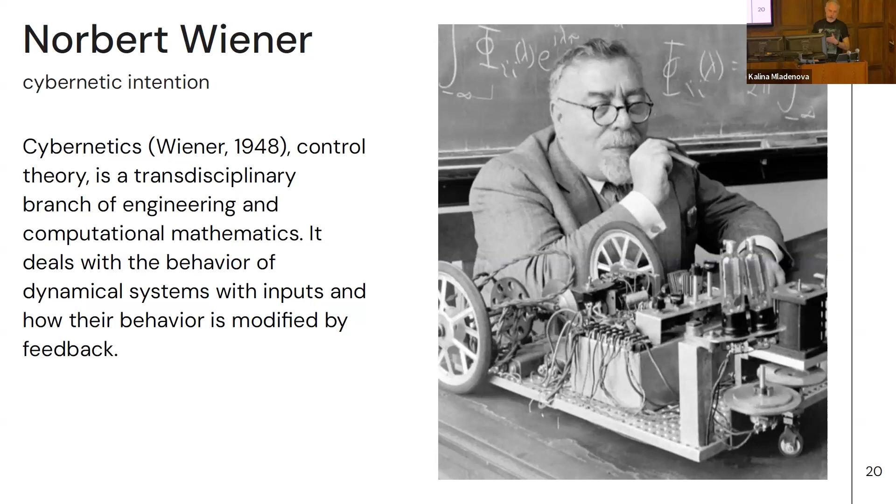One of the great inventors was Norbert Wiener in the 50s, and basically what he tried to do was engineer the feedback, the concept of feedback. Generally when those digital products—MES and so on—fail, it's because the feedback is not completely integrated, but it's a very core aspect of the digital. It's a great opportunity to go along that feedback, and I will of course give you examples. So feedback, very, very important. I have put at the end of this presentation a bibliography with a few books I'll share with you.

There is another aspect, and maybe at the end of this talk we can discuss not only the digitalization of industry, but also digital itself, and how it affects our society. I know that in the US, you like very much the French philosophers, especially those of the 60s and 70s - Deleuze, Guattari, Foucault - actually more than in France. In France, we dislike it, at least the students and professors.

Gilbert Simondon was a friend of Deleuze, actually, and he wrote a thesis about the nature of technical objects. He says something very important to me that explains a lot about how we collectively deal with technology: if we don't properly understand the nature of technology and machines, there will be an effect on society, which is both sacredness and rejection.

We see a lot of this - you open the newspaper and see that TikTok is very dangerous for kids. This is definitely rejection. On the other side, you look at startups in San Francisco, OpenAI for example, that can raise $7 trillion to build factories - both ways. And general AI will happen. This is completely false, but it's very interesting to see that somehow.

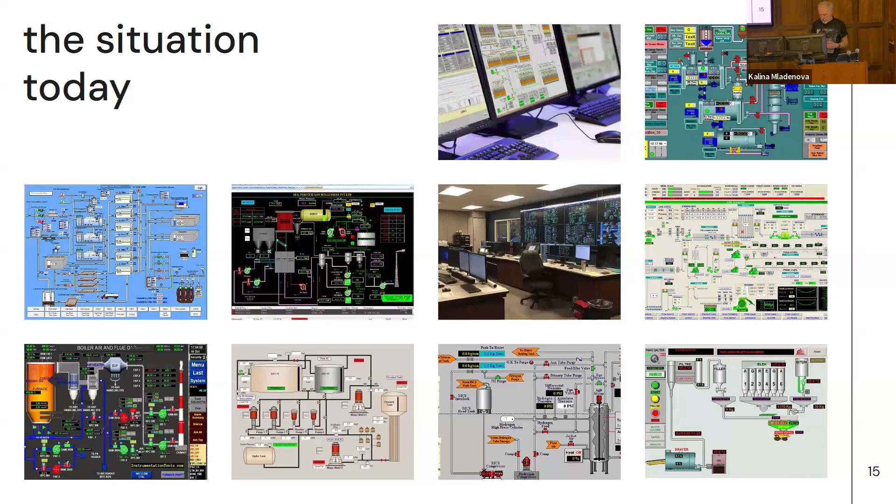Like you said, Chris, when you look at that kind of screen, here it's command and control. In order to do that, you can do a lot of things - basically whatever you want with the machine. But it means you are controlling that machine, you know everything about it, you are the master. But this is not actually the case in what you're trying to do in terms of digital. What you try to do is shift from command and control to being in charge, and this is completely different - you can be in charge without controlling, at least not so directly.

There is an important aspect here - something I saw from a French banker who explained his point of view on the difference between the physical world and the informational world. I think it really explains a lot of the difficulties industrials face when they try to integrate this informational world.

Industry is about a physical world, very tangible. When you go into a factory, you cannot cheat - you cannot say something is not happening if it is happening. You are dealing with physical material, and so on. We are talking about fixed standards - cubic meters, inches - and those are standards across the entire world. A meter is a meter, it's always the same meter.

We are also talking about finished products. When you deliver the potato chips, you cannot alter it, you cannot redo it - it's finished. And of course we are talking about the physical aspect of things, especially when we talk about machines that replace operators, the physical things.

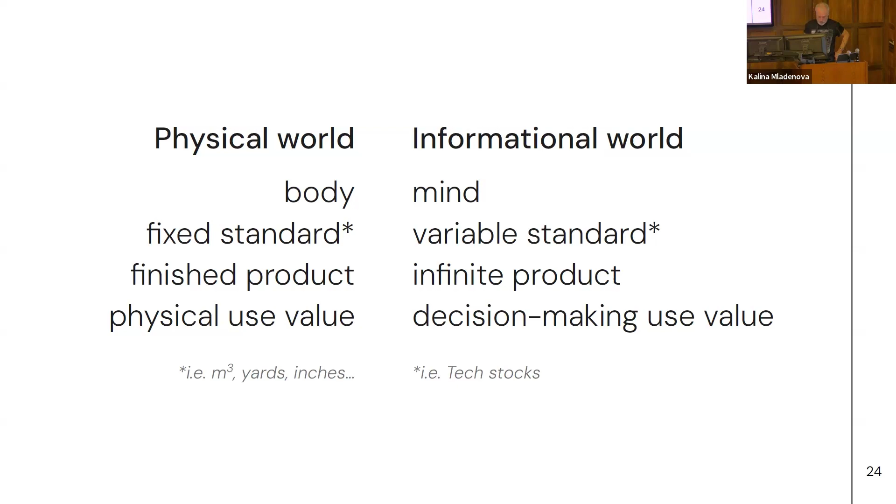Very, very quickly, I won't make a course about design, but there is one thing that I learned from my wife. I'm self-taught, and I literally married design. My wife is a great designer, and she's my boss also.

And she's listening to me. So there is one thing that she understood about design. Not every designer understood that, but it's very important in terms of project management, how to design things in this digital realm.

Is the fact that if we look at what is informing, giving information to something, there are two ways of doing it. You can use text, and language is by definition a way to convey information, but there is a problem: language is very, very ambiguous. The hallucinations of OpenAI or any AI, they are not really hallucinations, it's because language is very ambiguous.

If I'm talking about an ERP, and if I ask every professional here what is an ERP, you will all have a different answer. It's true also for MES. I have maybe 20 clients, 20 different definitions of what is an MES. So words are very, very ambiguous.

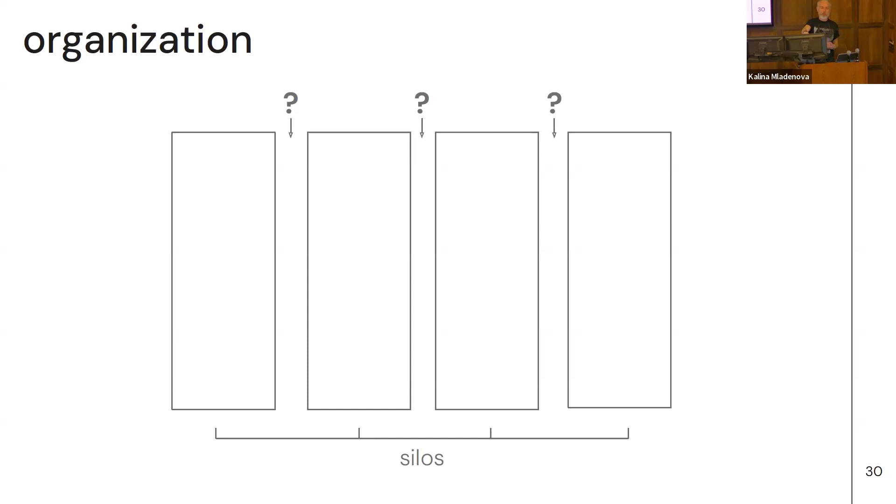This is why ownership is very key, because if you try to make something transverse, somebody needs to take that ownership, even temporarily. This is the only way to go through that kind of product. At the end, you can give the product to one of the parts of the silo, but still it's a problem.

I won't talk about maintainers, I'll just share my feeling about maintenance and sustainability regarding industry. Today we will mostly talk about factory managers, line managers, machine operators - people very grounded in factories. I won't talk about business unit managers or world company managers, but still, everybody is involved in digital transformation.

Normally, everybody should have the same screens and share the same reality because this is the same factories and the same assets. Like you said, Chris, the problem is the know-how.

And this is not only true for operators that last for 8 weeks or 8 months. No, it's true for everybody because of the boomers. Boomers are leaving, they are going to retirement in entire sections, and they knew how to run things. We are losing know-how every day in every factory in the entire Occidental world. I think it will be true for China in future years too, because they have that problem as well.

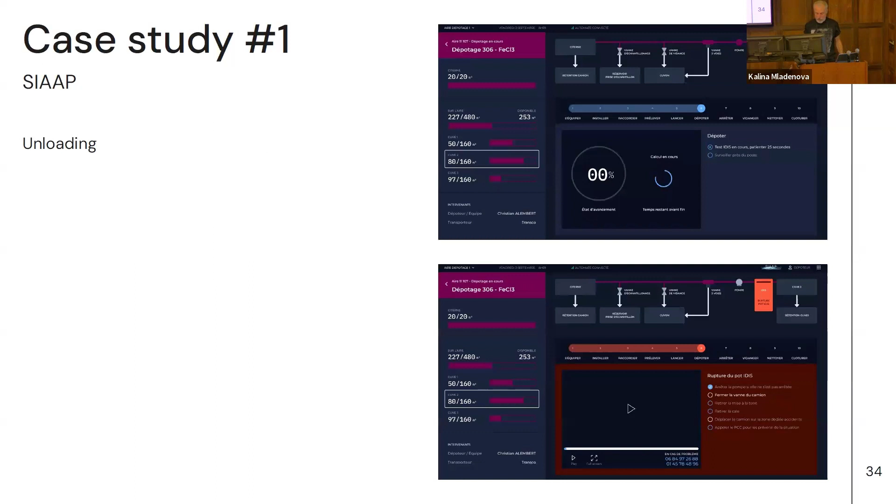This is the key aspect, there is no other aspect actually. This is the only problem everybody is facing, or at least the main one. So how to deal with that know-how? I will now give you 3 examples.

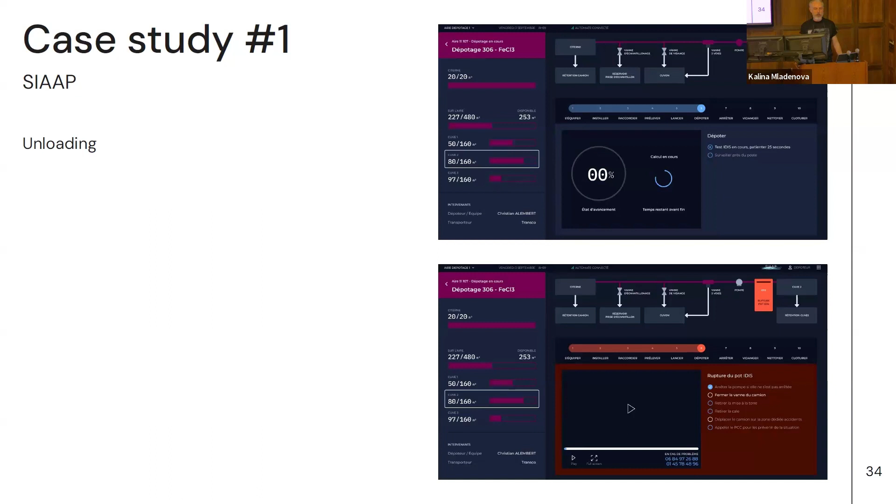The first one is a very basic one: unloading trucks in water treatment facilities. This is the interface that operators have today - buttons, no manual. And here you can see, I'm talking about unloading dangerous products, hazardous products.

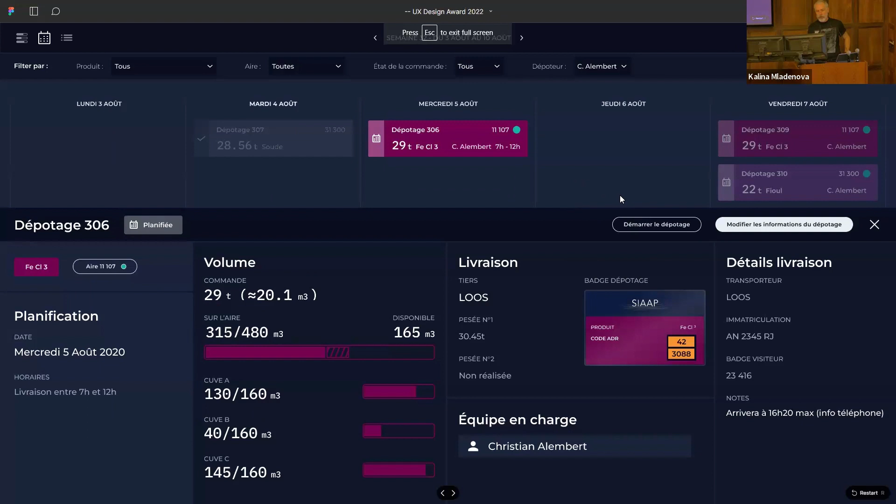And here, this is what we could design, what we can actually do. This is a real life example. So let's go here, for example.

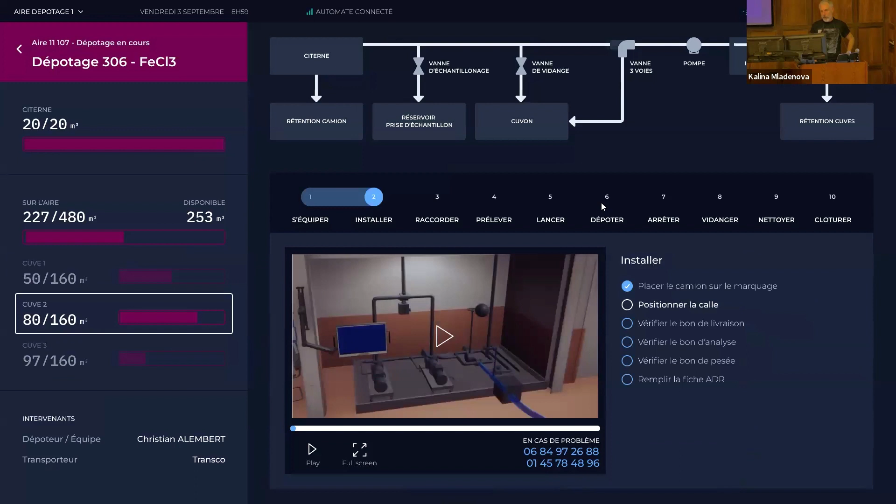There are a lot of principles that should be applied in every factory, in every screen. Those are principles that are very simple and basic. The first one is feedback - for every step, the operator has a feedback on what they are doing. Second, the context.

Here, an operator can use that interface and unload very dangerous product in less than 5 minutes - if, of course, he's capable of it. Not everybody is capable of doing that kind of thing. So you have the context: where to unload, the quantity available in the tanks, the quantity in the vehicle, the people in charge, the organization of the system, where the product is in that system, the documentation of all those different tasks, and if the operator doesn't know how to use it, there's a small video he can play to get the information on what to do.

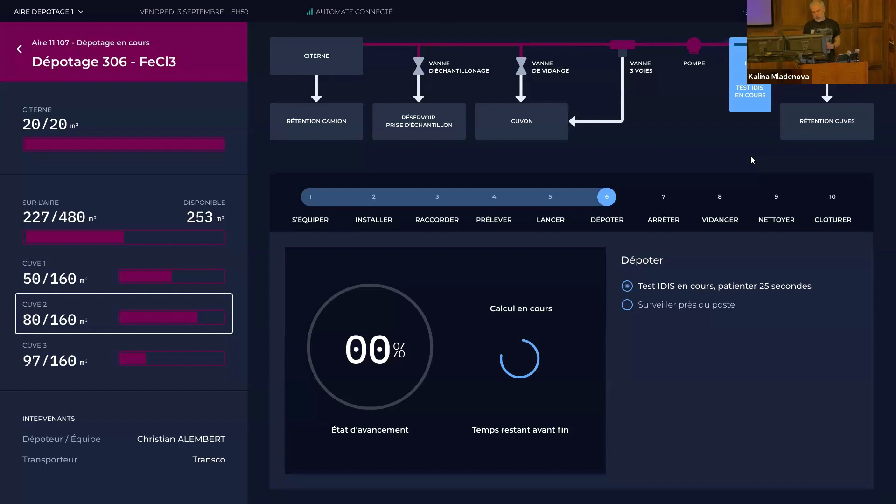This is especially true for one thing related to cognition. There is a problem with humans - when they are stressed, they lose cognitive capacities. It has nothing to do with intelligence or IQ. If I'm yelling at somebody, he will lose cognitive capacities. And here we are talking about unloading very dangerous products - when you do that, you put people at risk, yourself and the population around. So you might be very intelligent, but you won't be at full capacity in terms of reflection, and the problem is when there is actually a huge problem.

And here, this is where it becomes interesting because, okay, simple things to do - let's say we can live without it.

But in case of a very big problem, the operator can follow the procedure to be safe himself, but also to keep the entire company safe. This is a very good example of good practices.

Here again, this is a matter of feedback. There is a problem, you see the problem, but you also see the procedures related to that. To my knowledge, very few companies have that kind of system, because of the silos, because of how procedures are handled. If I go into any factory today and ask for the procedures, nobody is able to give them to me. There was a procedure at some time, but it's in a Word file, an Excel file, on some computer, with somebody. Maybe in an hour, maybe in a week, you could get that procedure. In reality, it's not very industrial or engineered, and yet it works very well.

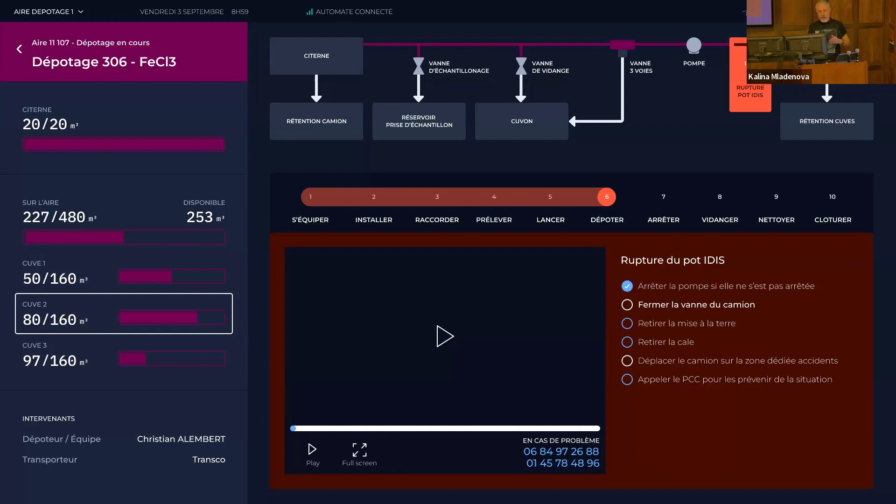The other example I wanted to share with you is a bit different. It's the same water treatment company, a very huge facility, 2,000 acres, so a very huge space.

Again, this is about people, about how people react in front of very complex systems. When I look at that huge factory, there is no manual, no driving wheel, nothing to pilot it with. There are only the screens I showed at the beginning. You see the equipment, but you don't have an overview of what is going on, no clue about the global context. So in that situation, what do humans do?

We tell ourselves stories, collective stories about how things work. Actually, it's true for almost everything. We don't understand how banking works, for example, so we tell ourselves a story, maybe in groups.

So our work was to work with the actual operators of that huge factory and try to figure out what stories they were telling themselves. Not only the procedures, but the overall context, how they run that huge facility, wasn't written anywhere. It was the 20 to 30 people running that facility, or that part of it, who told themselves a story about how to run that plant, but nobody had written it down, and it wasn't on the screen.

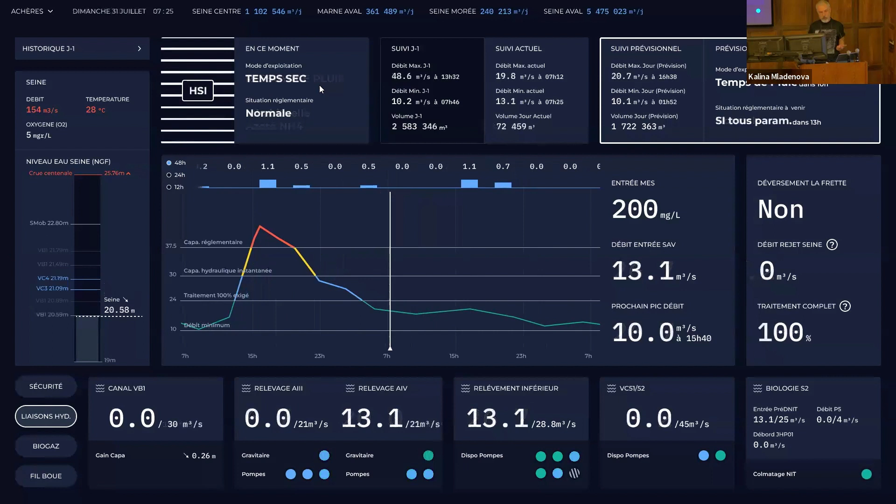So this is what we did: we put all the stories together. Of course we also put the technical aspect of things, and we put it on the screen. So now in 5 minutes, they can have an overview of what is going on, what the next step is, whether the plant is running right or not, and of course they get information about several contexts, like for example the level of the river, which is very important in that case.

The reason why it works is because of that. We were talking about MES and so on, and it's true for everything. One of the key reasons for the failure of digital transformation in industry is that you ask engineers, and only engineers.

They don't provide very good screens. This is their point of view: they are in charge, they should know, and generally they say that if things are not going properly, it's because of the operator. But the reality is not exactly that. Of course the engineers know how to run things properly, they are engineers.

But at the end, there are people dealing with the equipment and facilities all day long. They know how to run it. So generally, digital transformation fails because you just ask engineers and say, okay, operators will obey these new things, and it doesn't work. Of course, if you do the opposite, it doesn't work either. You should have everybody in the same room, again, because of silos.

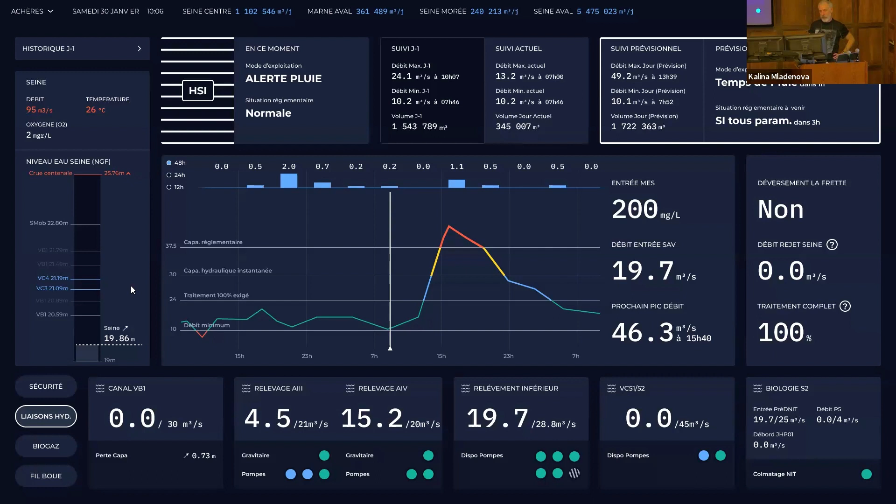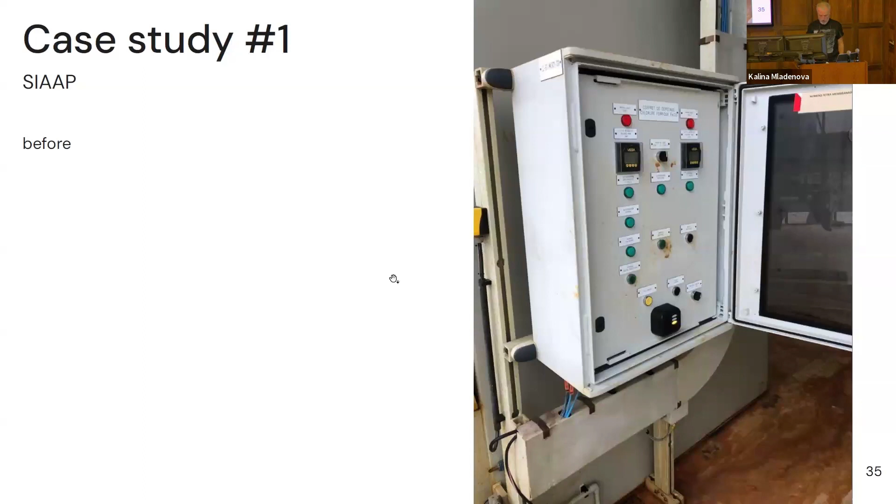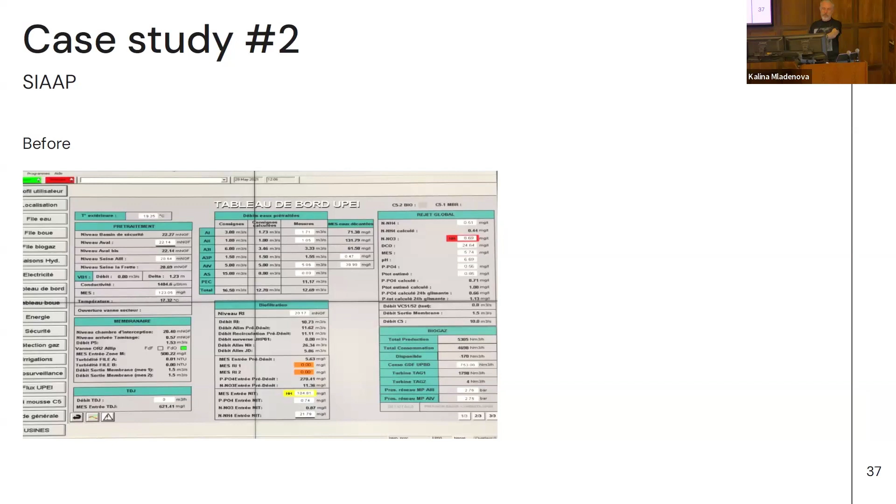For the third use case, I will ask Chris to come and talk. This is basically the screen that they have today on the huge facility - that kind of screen where there's a lot more information than the screen I showed. This is the new screen, there's more information here, and this is much more legible.

Nice, these are your slides. Oh, just okay, if you want to present very briefly, Heat and Control. Let me just say, real quick, that...

You guys, I'm really excited for you because the operators you saw in those slides - those people are going. The operators who understood how to read those screens are moving on. If you bought a Utz potato chip, it was produced at a plant where the husband worked the fields and the wife worked the factory. She worked there for 45 years. The person that replaced her stayed for 6 weeks, and the next person stayed for 6 weeks. We're losing that subject matter expertise that knows how to run those lines, and we've got to be able to transition over.

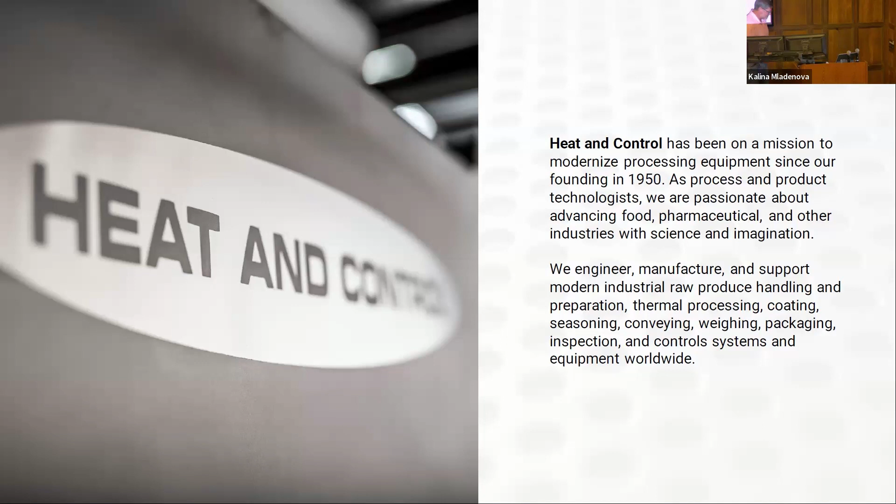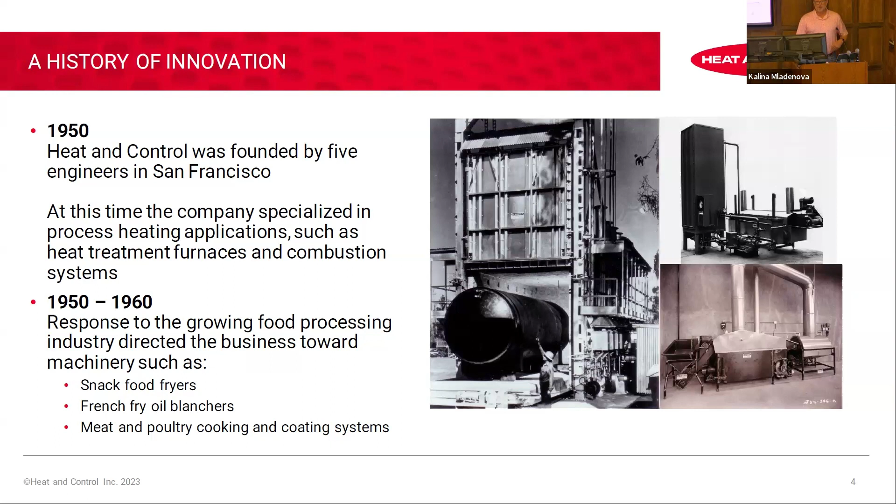With Heat and Control, we make the equipment that produces all those chips. It came over the years in the 50s and 1960s - a couple of men came together and started working in the process industry heating up tanks, and they gravitated over to the food industry. We created these vast big fryers that could do 5,000 pounds of chips an hour. Then those moved into distribution systems, and customers would have to weigh this stuff.

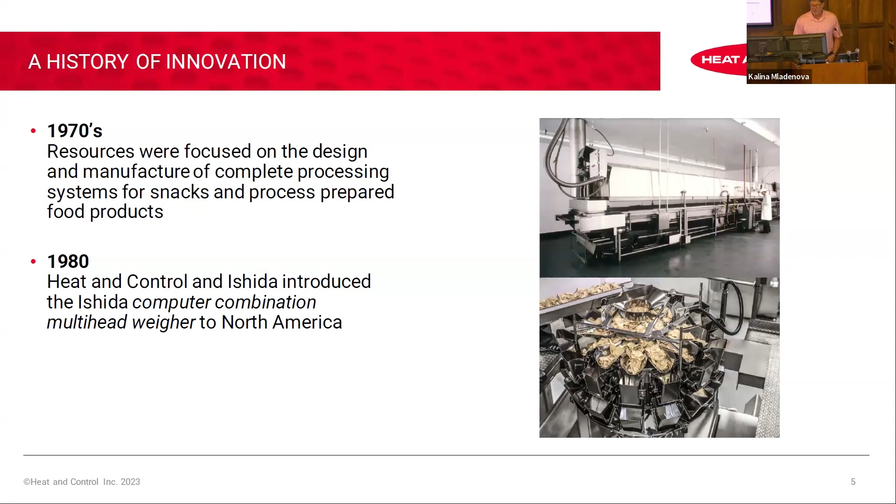When the Japanese stepped in at Ishida to create the circular scale, where we take fast calculations and add up how many chips are in each of those buckets - from that we make a dump, which makes the bag of chips, and we put it in a bagger. We became Ishida's representative in North America. Then we added product handling equipment to move all those chips around to get them to the packaging area. We've added a bunch of companies since then, and we're $750 million globally.

We work with every snack food company in the world. If you're over in France, Europe, and Germany, we work with Intersnack. In the States, we work with Utz, Frito-Lay, Shearer's. We also make egg rolls too, and we do all the pre-cooked stuff that goes into Chili's. The same egg roll that's in some of the nicest restaurants and at Panda Express came from one factory - there's not a lot of creativity when it comes to egg rolls.

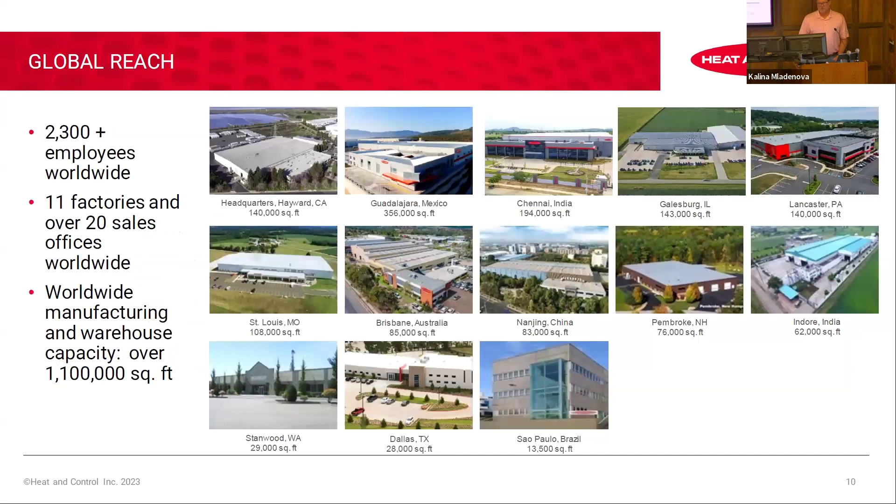Moving forward, we're just a big company and we have a blast doing what we do. But...

Your generation, unlike my generation - when I got out in '86, we just wanted to turn product out the door, make a living, pay our bills, and go on vacation. You have the opportunity to do more than that. You have the opportunity - you've got to do that, it's baseline - but also to help our planet to a certain extent. If you look at what we have in the way of the planet right now, 14% of the earth is fertile, that's it. We have to help a lot of that percentage in order to grow crops and what turns out to be a potato chip.

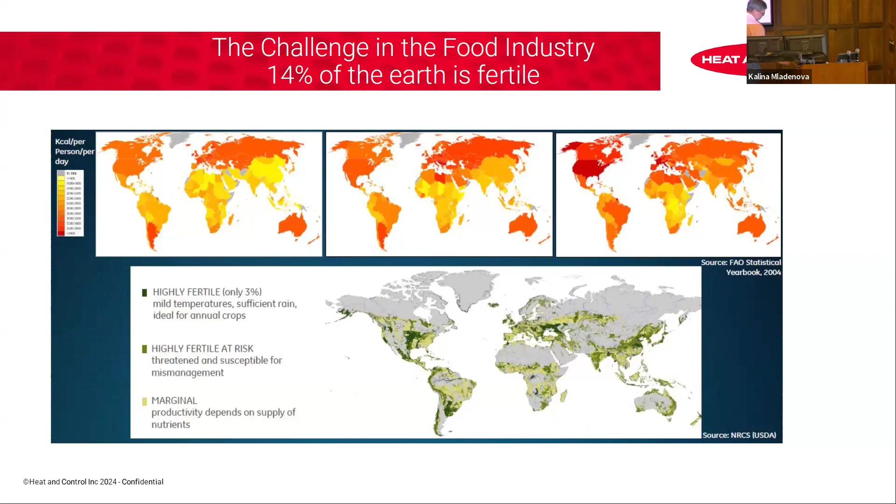When a potato is harvested, it loses just 20% of its content right from the pulling and harvesting. Then as it moves to storage, because people like chips in January and we have to store them until March, we get shrinkage and lose another 9%.

Then in the processing area, we trim the potato, clean it, slice it, and run it through the fryer. We lose about 15% there, and 7% more as the chip comes out the door. By the time we get to final consumption, only 32% of that original potato is left. As a manufacturer in this industry, I've got to create better yield and use less product to make as much volume out the door.

Your generation gets to address that. We're starting to now.

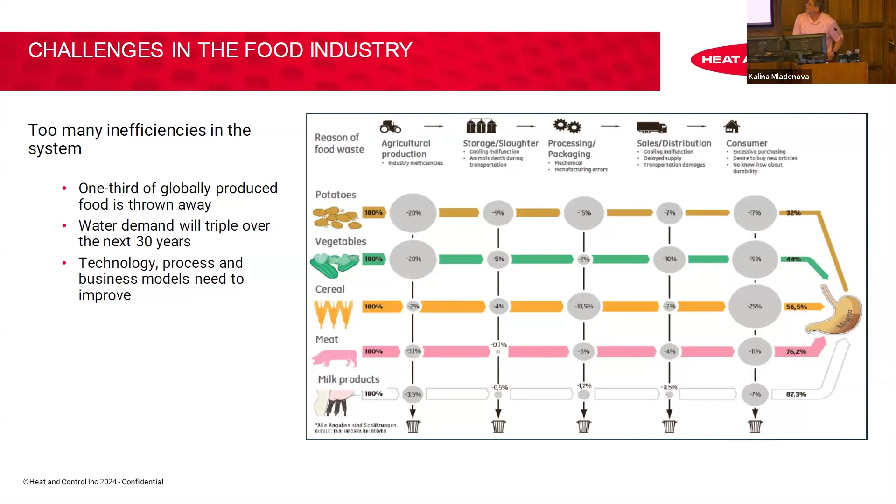There's a 29% reduction in food and snack manufacturing CAPEX, it's just getting tighter. Money's hard to get, so people need to be able to increase yield with what they have. We've got to do more with less, and build better graphics on our OITs, easier things. Better to better beats better to best—think about that. We've got to make screens that help our operators improve every day.

Customers' equipment is near end of life, and a proportion of the workforce is set to retire, 50% by 2025. That's where I'm getting at—that point where the older folks who know the systems are moving on.

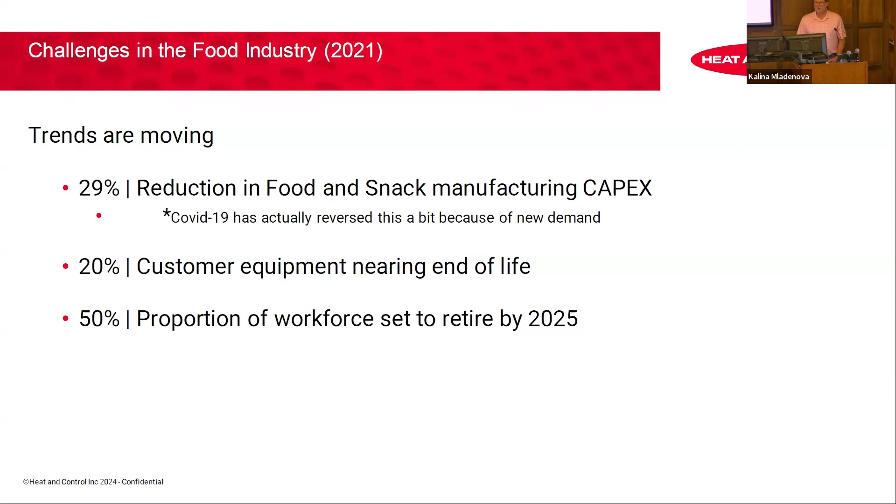In our industry we have high turnover, 6 weeks to 5 months, and you must train people while they're running the line. These very expensive assets, which hold your company's DNA, are being run by somebody who just left McDonald's, like I said earlier. You need to build screens that add value to their lives—people want to do something they feel has value, they don't want to just come in and do the mundane thing every day.

Like I said earlier, we're having to look at gamifying our screens. That's the big push for us right now—how can we make feedback closer to what they experience on weekends or in the evenings, to add value and improve efficiency.

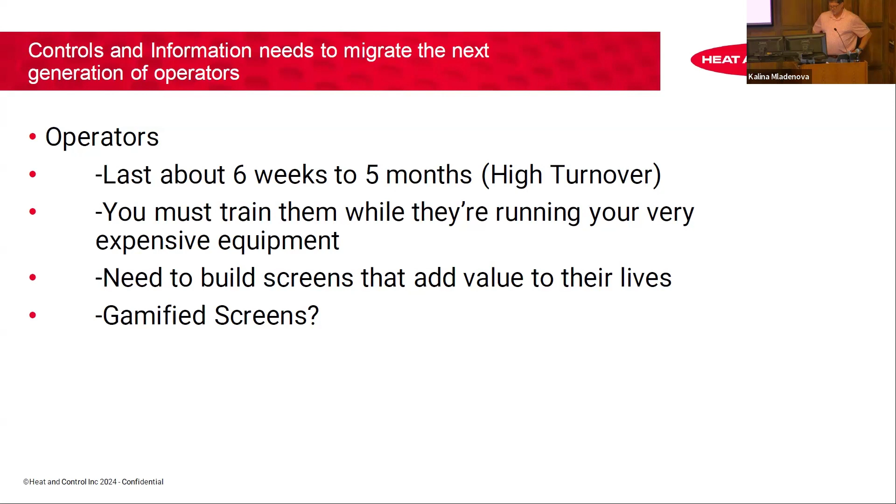So that's us. And this guy did an amazing job with our screen—I will share with you.

So we'll share some of the key screens that we designed with Chris, actually, and the Audis team. Interestingly, you see on top an entire line of production, and here's a good example of what those silos are. The silos aren't just management silos—finance and so on—there are also silos in terms of product. There's a team for the fryer, a team for the in-kitchen seasoning, one for the burner, all completely different. They don't talk to each other because, you know, my equipment is different.

So this mindset of 'my situation is different' is literally the problem we have to solve—basically how to make something that fits every need. And we have to find common ground for that.

One of the things we did was try to respect the fact that, like Chris said, there are trained operators in the field today, but there are also new ones. How do we deal with that? If we make something too easy to use for the old, trained operators, they will reject it because they'll feel like a child. On the other hand, how do we ensure the new ones, the rookies, can actually use it?

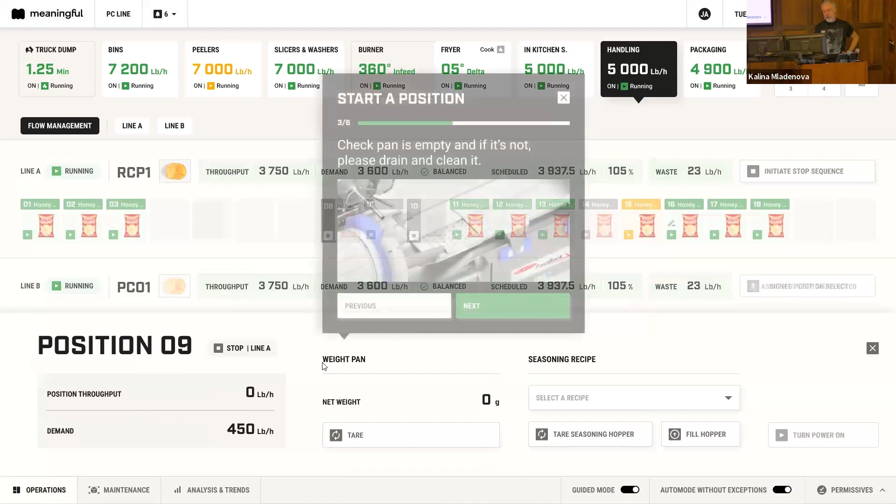If you are not, you can definitely use this guided mode. We designed all the screens with all the content of the different steps, so the operator can actually follow what is at stake.

You are saying, Chris, that the idea is how to make meaningful things, trying to help the operators have more meaning in their work. Training them live helps them understand what is going on. It's meaningful because people want to understand what they are doing, basically. And if you think of your screens or your HMI as media screens, they are media. You can do a lot of things with media. You can control, but you can also learn, basically.

So this is what we did, and the idea is to have an engineered way of working with those screens. Here you have an example... you have one piece of equipment, but here we are looking at a completely different equipment. The look and feel is the same. We try to stay in the same philosophy, so that an operator from one equipment can work on another equipment without having to relearn everything because it's different.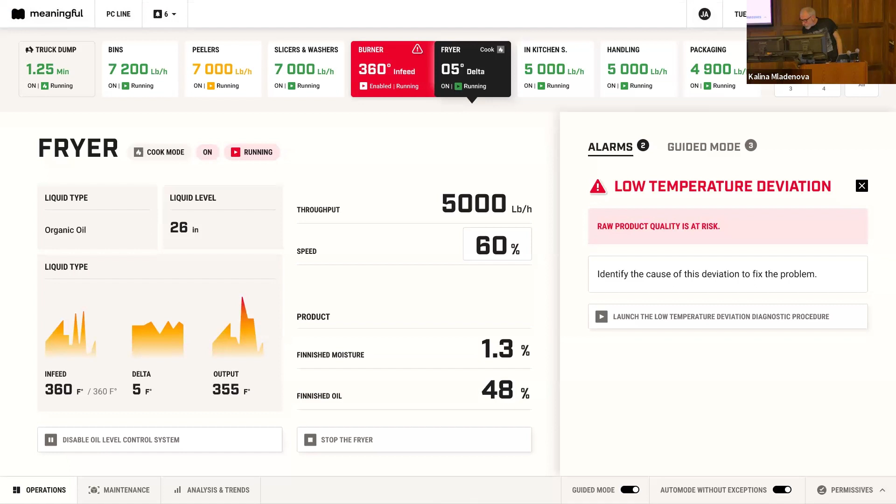design aspect. Maybe before asking Chris for his feedback, I would just finish my presentation. If I find it, where is it? Because we have the chance of having...

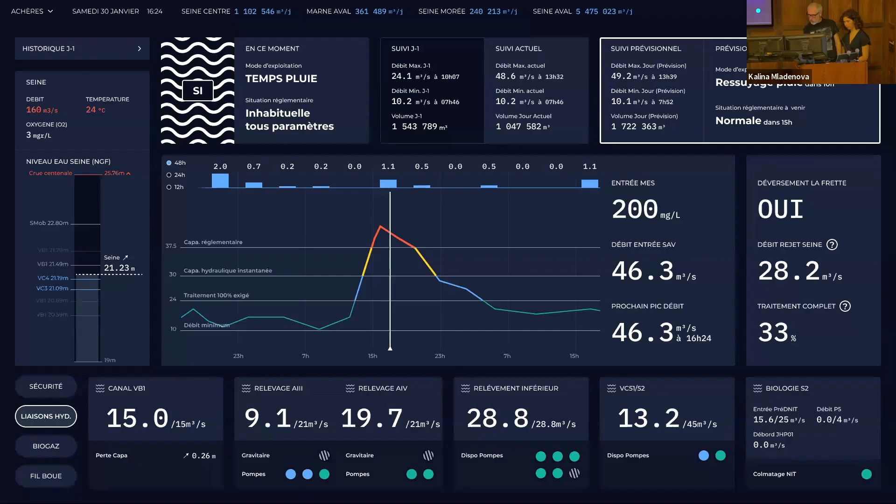Thank you very much.

Chris, you were talking about the future, and a lot of industrials here were curious about how to deal with digital transformation. So maybe before talking about process design, this is my understanding from 10 years of working in the field of industry and digitalization of industry. This is a design point of view, not a technical point of view.

I figure there might be some kind of maturity model for the HMI or the interface, but that is also related to technical maturity. The first level, I would say the zero level, is digital twin, because if we're talking about digital maturity now, the fashionable term is digital twin. Digital twin is just the fact that you have achieved the entire digitalization of all the data that you could gather in the factory, whether manual or automatic.

The first screen that I showed you, in reality, this is level 0. You just have information about equipment. The feedback is very poor. You only have feedback from equipment, but running a factory is not about running equipment. Running a factory is about producing things and shipping things, which is not exactly only about dealing with PLCs, for example.

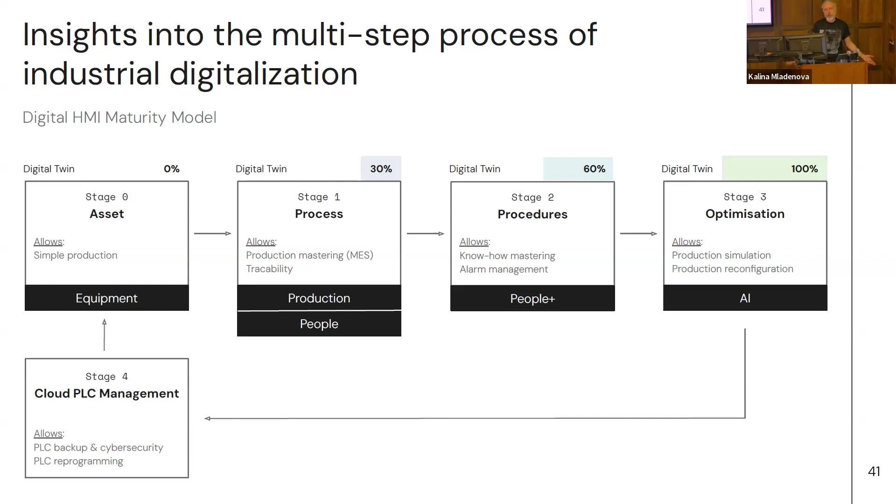Maybe with the digital twin this could be better handled - I'd say maybe, this is the promise. So this is my point of view. Generally, projects fail in reality because everybody tries to go to stage 4 or stage 3 at the beginning. They say, okay, let's do a complete optimization and digital twins - no, you don't have foundations. It's like making a building without foundations. It won't work.

And finally, maintenance and sustainability, like you said, Chris. This is a discussion I had with Kevin, who is a partner of Chris. Why are we struggling with sustainability? Because we're not at all dealing with sustainability collectively. I mean, what is at stake? There must be a huge problem, much more important than just saying okay, we need to be sustainable. But why aren't we able to do it? My take on it, my two cents.

I don't know if you've heard of Simon Sinek. He's about my age, he's on LinkedIn, he's kind of a guru. He's very good at speaking about others' ideas, but he has an audience, so it's interesting. Lately he talked about a very important book - I put it in the bibliography, which is not there. This is a book from James P. Carse, a theologian, I don't know if theologian means something.

He works as a philosopher, or let's say religious philosopher, religious scholar. And he wrote a book about the two types of game. There is the finite game and the infinite game. The book is called Finite and Infinite Games.